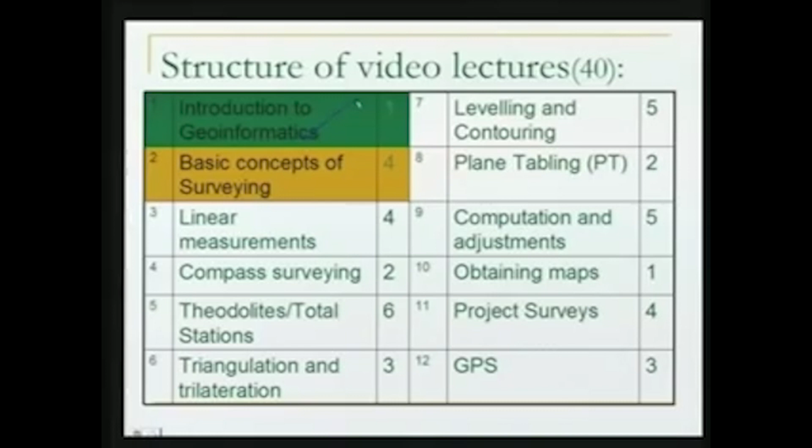Okay, hello. So we are again in another lecture on basic surveying, and this is lecture number 2 of module 2. Our module 2 is on basic concepts of surveying. Let us go back to our entire structure of the video lectures. We have already done module 1. We are at the moment talking about module number 2. In module number 2, we have already discussed this particular part in our last lecture. So let's just recapitulate that.

We defined surveying, and also we said how surveying is of concern to engineers, maybe mining, maybe civil, any. And basically our aim is to measure the geoinformation. Now we saw many examples. We started from building construction, town planning, the example of the Eurotunnel, a bridge, a road or route alignment, and using all those examples we understood how surveying is useful for an engineer.

We cannot do any project without surveying, because we need to bring the ground into the laboratory. This is what we saw yesterday. Then only we can work on that ground. Working means the planning, the designing, all those aspects. Once that design is complete, we take that design to the ground. So again measurements are involved. So we saw yesterday where surveying is required.

Then there are two types of surveying. One we say surveying, and the other one is laying out. Surveying means doing the measurements there on the ground, making the map, doing other kinds of measurements of geoinformation, and then bringing it into the laboratory. Once it is in the laboratory and we have worked upon it, our design and planning, we take it out. So that part was called laying out.

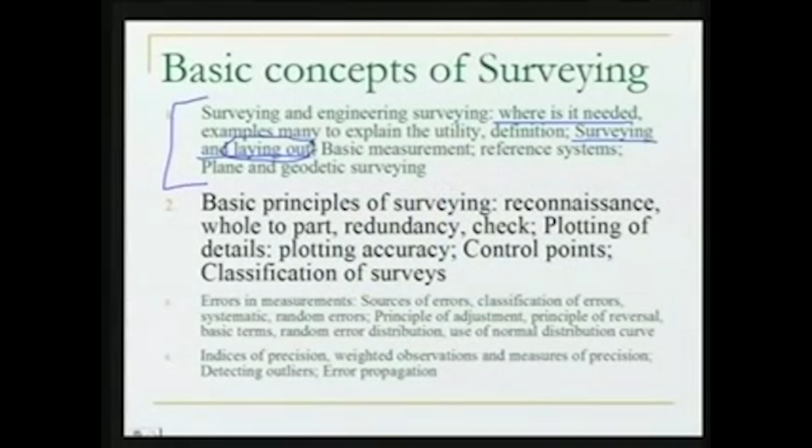Then we discussed that surveying is basically about measurements, and we cannot measure without any reference. I gave you an example of a 1-year-old child, and his father was telling me that his child is of this height. He forgot to put the other hand, the reference, because a 1-year child can't be of this height. So the reference is required. So the reference is very important in any measurement, and we need reference for measuring the geoinformation.

Now what is the reference? Reference is a mathematically definable system. The geoinformation is on the surface of the earth. Can we use the earth surface as a reference? It is not possible, because the earth surface is not definable. We do not know the characteristics of the earth surface. We can't put any equations for that. So we cannot use the earth surface as such. So what was the other thing?

We thought of a surface which is physically existing. That is the equipotential surface, a surface which is always perpendicular to the direction of gravity. This surface is also called the level surface or geoid. And the physical surface which is a geoid is the mean sea level or the surface of the water body, because all over the water body the potential will be the same. So the surface of the water body makes a surface which we call the geoid.

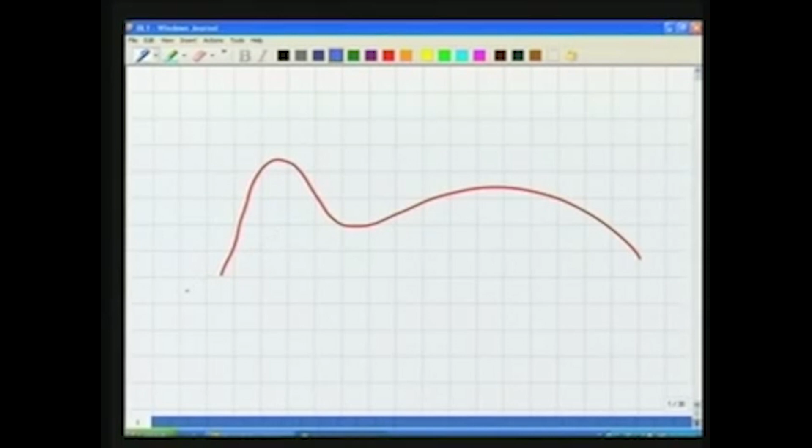So what we did last time, I am going to draw the surface of the earth here, and the geoid in this, let us say, is like this. Here in this part, it is the surface of the sea maybe. So what we can do now, we can refer the heights of points from the geoid. So that's the direction of gravity. Similarly here, for this point, we can refer the height of this point from the geoid. Also the same thing here, the depth.

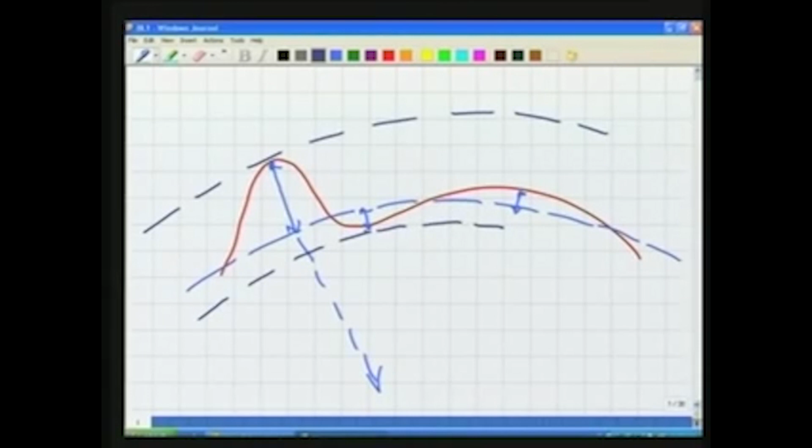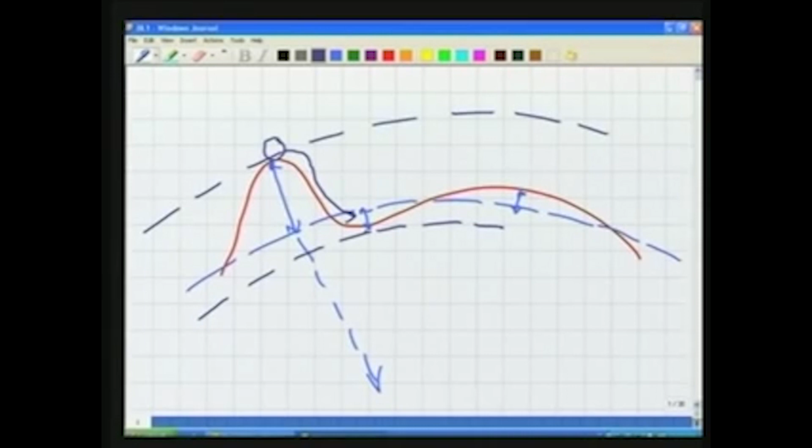Now what we are talking, we are talking that there is another level surface here, an equipotential surface. There is one more equipotential surface passing through this, and as we see, if we put a water droplet here, it will flow in this direction because this level surface is higher than this level surface.

So what we say? We say this point is higher than this point by this amount. So the difference in elevation between 2 points is the separation of level surfaces which are passing through those 2 points. So in any engineering survey, we use the geoid for measuring the elevations.

Well, when we are talking about the geoid, how about the x and y? Yes, we can use the geoid for measuring the elevation, but what about the x and y, the positions? So what we did for that, we considered that for our earth, we can fit an ellipsoid, an ellipsoid which fits best to the surface of the earth. Now this is an ellipsoid for which we know the mathematical equation, and we can project our points on the ellipsoid.

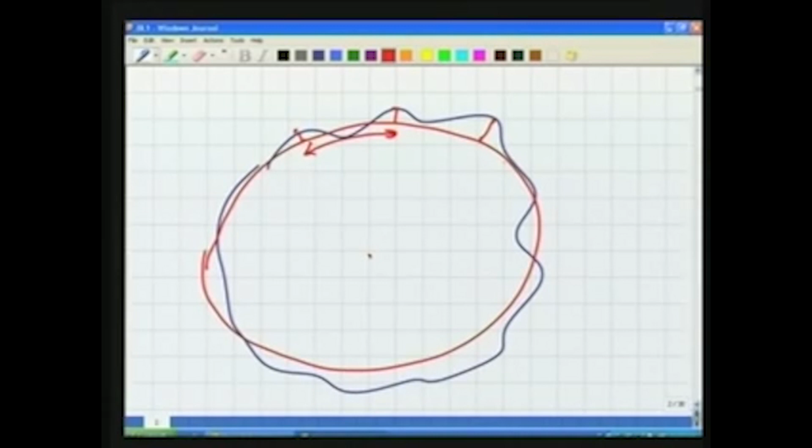So now the distance between these 2 points is actually the distance here on the ellipsoid. We know the equation of the ellipsoid, so we know the characteristics of the ellipsoid. So we can use the ellipsoid for measuring x and y.

Now another thing, why do we need a reference? As you know, Mount Everest is the highest mountain in the world. How come? Why not the Alps? Because both of these have been measured using the same reference. If both of these were measured using different references, we could not compare these two.

So Mount Everest is in one part of the world, while the Alps are in another part of the world. So in order to compare these two, we need one single reference which is passing through both of them, and only then can we compare the elevations or the heights of these two. So for this purpose, we need one reference system.

Well, we are saying that our reference system is ellipsoidal here, and any distance that we are measuring between point A and, for example, point B here is the distance along the curvature. Of course, the distance between points A and B should be measured considering the curvature of the earth, because this is how they physically are. But this is true only if we are talking about a very large area. This is not true if the area is very small.

So for our engineering surveys, our areas are generally smaller. An engineering project, for example, let us say it is 20 kilometers by 20 kilometers. Then the separation of the geoid or the ellipsoid or the curvature of the earth from a horizontal plane in 20 kilometers is only 10 mm. I am sorry, not this way, but this separation means the difference between the length of the chord and the length of the arc for 20 kilometers. This difference is only 10 mm.

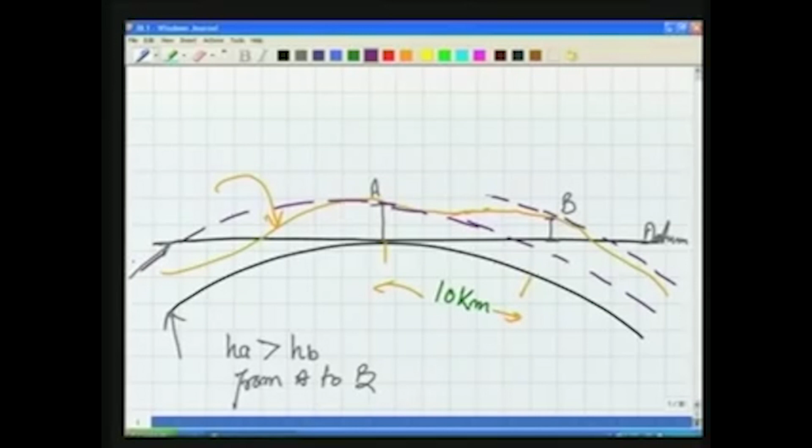Well, let us look at the geoid or the level surfaces, equipotential surfaces. The equipotential surface passing from A will be again parallel to the geoid. So, we can draw it like this, and also from B, passing from B, will be like this. Well, what we observe, one thing very interesting: the equipotential surface or the level surface which is passing through A is higher than the equipotential surface from B. What is the meaning of that? The meaning of this is the water will actually flow from A to B, not from B to A.

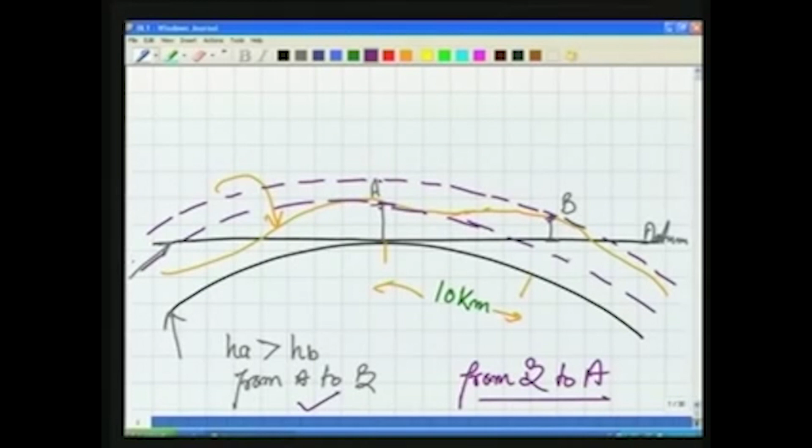So, what do we mean by this? We mean that if we are taking a horizontal plane for measuring elevations, our elevations will be wrong. It might happen that we are giving the elevation to a point, as here A, more than to a point B, despite the water flowing from B to A. So, we must always measure the elevations from the geoid, not from the horizontal plane. In all our engineering surveys, we can consider our earth flat for x and y, but for Z we must measure from the geoid. So, this is an important concept, we should keep that in mind. This is what we had discussed last time. These are important concepts, that is why I wanted to repeat these.

What will we do today? Today we will start our discussion with some principles of surveying. Now, what is the meaning of this? The principles of surveying means there are some things which we should keep in our mind always whenever we are doing surveying. And in order to explain all those things, I will give you one example and we will start with that example. Let us say there is a field, an area, a terrain, of any size on the ground. There are some rivers here. There are some houses here. There are some roads as well.

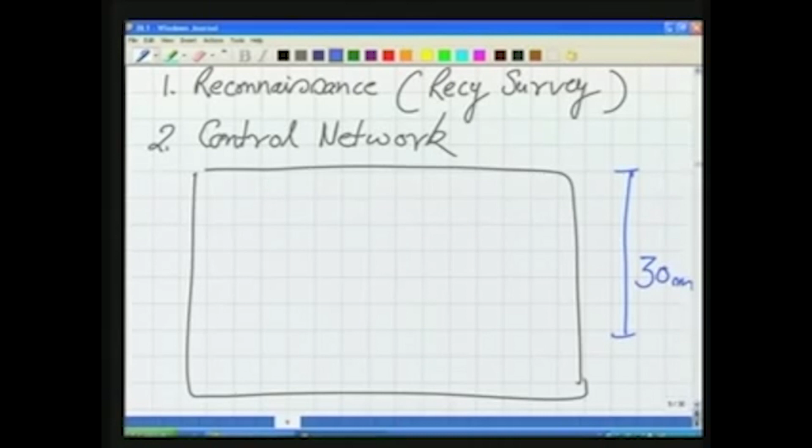It is not that you start measuring from individual trees, the distance between two trees, the distance between two houses. For example, in this area, how will you make the map? It is not that you start measuring the distances like this between the trees, between the river, from tree to the river, from tree to the boundary, these individual measurements. No. First, you have to establish a control network.

Well, the control network could be, let us say that you establish a control network here, another point here, another point here, another point here, one more point here. I am considering here that it is possible for us to measure distance across the river using the tape. It's a small river and you can do it. Okay? Now, by doing that, your network will look like a network of triangles. We'll explain this thing.

Let us say that's your network. We will understand very soon the utility of this. This network is also decided at this stage of reconnaissance. You decide about those points which will become your control points. Now, why we want to do it? We want to do it because by establishing these points and measuring the distance between these points very accurately, we can take this skeleton of the area in the laboratory.

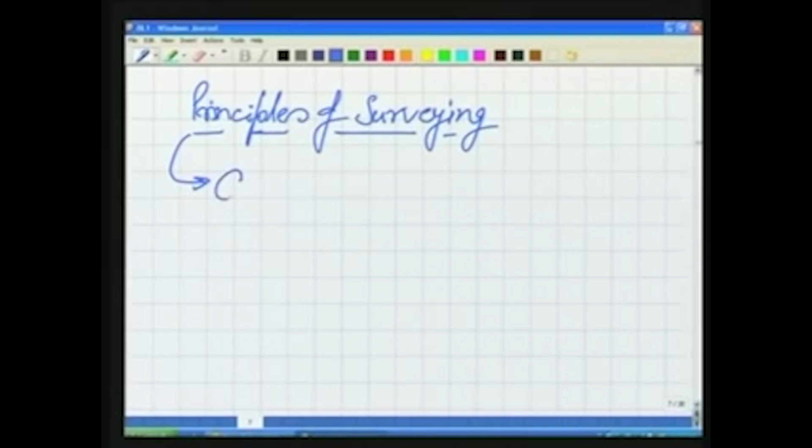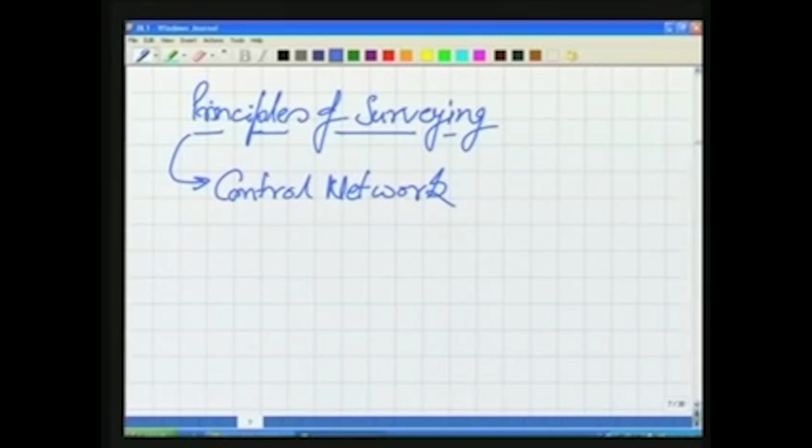So, in the case of the principle, what we learned here is control network. Always before we begin our survey, we should establish a control network, and the control network controls our survey. We will see in a moment how.

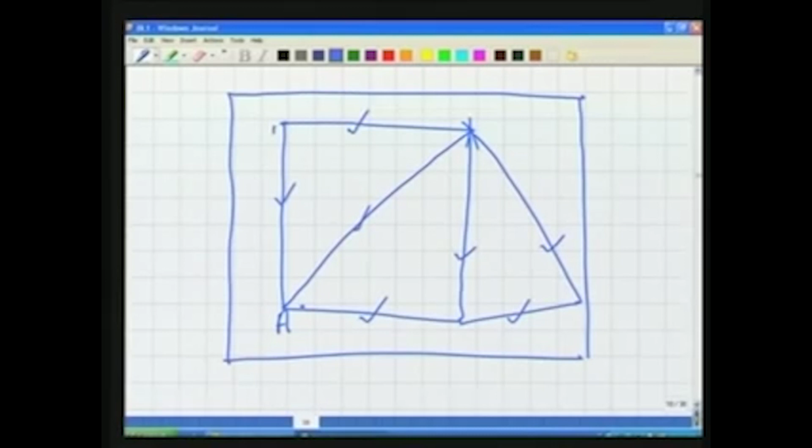Now, in our area, we want to measure the individual things. So, to measure the individual things, from any tree I can drop a perpendicular here, isn't it? So, what I know, along this length at certain x, the distance of a tree is y. Okay. So, I will do the same thing here. Along this, at a certain length x, we have a distance y, and at that y we have a tree.

So, what have we done? We have now plotted one tree. Similarly, I can plot the other trees also. For example, let us say for this house, I take the measurements of this house from this line by drawing a perpendicular. I measure this x, I measure this y.

By measuring this x and this y, in my map this is the x and here is the y, and we know there is a house here. So, I have plotted the house also. So, now you will start realizing the significance of this control network. Now, some principles which we must follow and we must keep in our mind always.

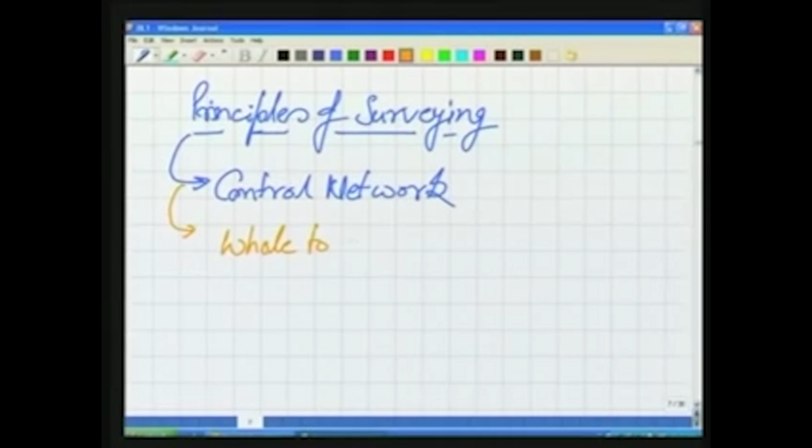One principle is working from whole to part. This is a very important principle, working from whole to part. What is the meaning of this? The meaning is, as we saw here, first we mapped the skeleton of the area. First we mapped these distances. We didn't start measurements from individual features, individual trees. Rather, we mapped our area first in a big way.

We measured these distances very accurately, the L1, L2, L3, L4, L5, all these, and then we plotted them here. We brought the skeleton of the ground here on our map. Okay? So, we are working first in the whole, the skeleton of the area we are bringing here. We are not bothered at that stage about the features.

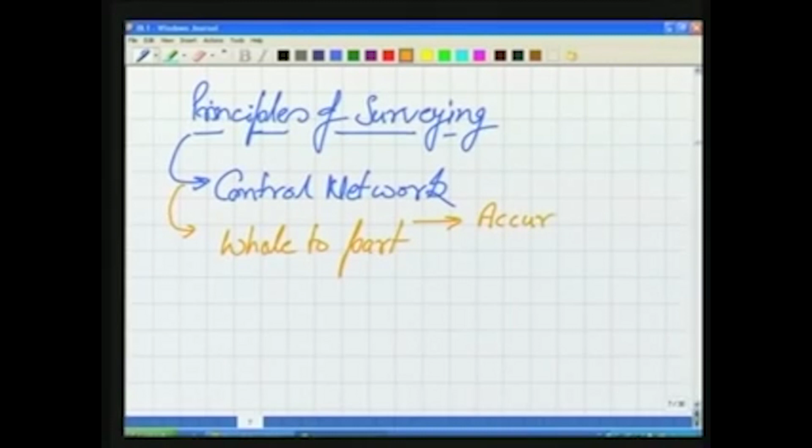But in the second stage, now working from whole to part, we make use of the control network, these triangulation figures, and then we start plotting each and every detail. Now, what is the advantage of this? Why should we do it? For this principle of working from whole to part, one advantage is accuracy. Why? Now, you take it like this.

Our first control network, the triangulation figure, we measured very accurately, and we made use of that for the plotting. So, these survey stations are transferred here very accurately because we took utmost care in measurement of lengths. Now, after that, even if we are slightly careless in measuring this y, it does not matter because it is not going to affect the plotting of this house, because these two are different things, the plot of the house or of any other tree here, which we are plotting by measuring this distance and this distance.

So, we can say x here and y here. So, by this I can plot this tree. Again, this is an independent plot. So, this particular plot does not affect at all the accuracy of this plot. We may be slightly wrong in measuring this, but it is not going to affect the rest of the map. So, our errors are not going to accumulate, they are not going to add up.

While, let us say I start doing the mapping from part to whole. What is the meaning? I measure the distance between these two trees, then between these two trees, then from here to river, from here to river. You know what I am doing? Any little error which I introduce in measuring this distance will be accumulated in all the measurements which follow later on. Okay? So, in working from whole to part, we maintain the accuracy, we restrict our survey within certain accuracy. So, this is a very important thing.

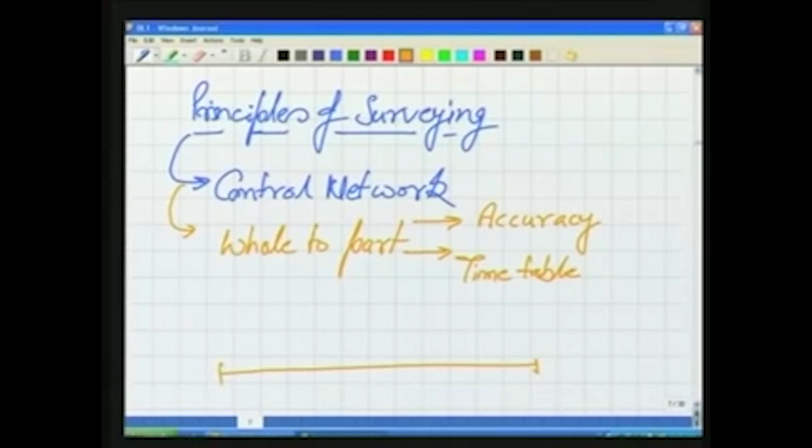And I have to plan my lecture in these 60 minutes. So, what do I do? Well, I have got 60 minutes. Now, I plan my first part of the lecture, second part of the lecture, third part of the lecture. I plan within the 60 minutes only. It is not that I am going to go over the 60 minutes, because I know my boundary, I know the whole.

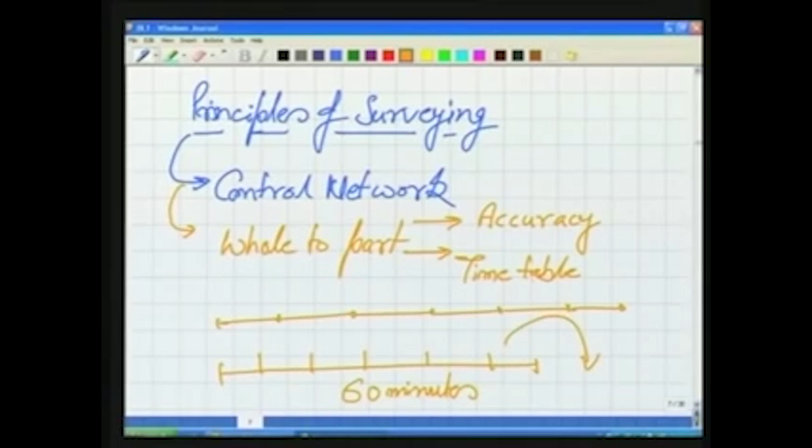Had it been otherwise, if I had not been given any time, I would plan my first part of the lecture, second part, third part, fourth part. Without knowing my boundaries, I might spill over. So that's the idea, and we should understand it, because in our life also there are many things we do where we implement this principle of working from whole to part.

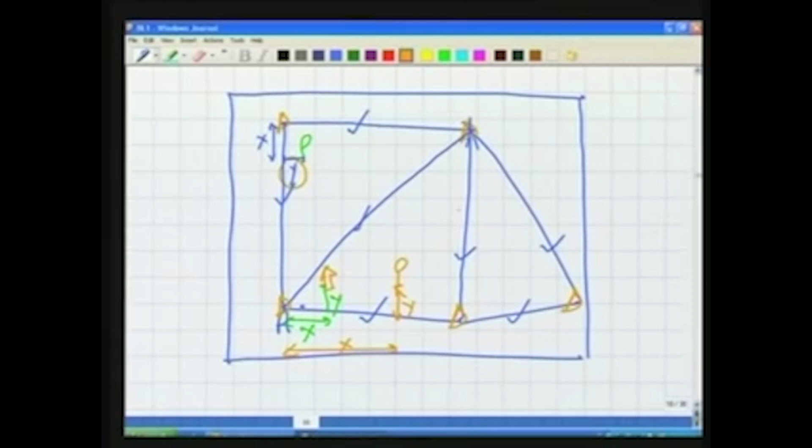Okay. Now the next principle. We have talked about one principle that is very important, and the control network is a part of that, that is working from whole to part. We discussed one more principle, that is the reconnaissance, observing the area beforehand. The next principle: we have taken utmost care and we measured these lengths. What if some of these lengths are measured with error? What will happen in that case? Let us say this L3.

When we measured it on the ground, we measured it with some error. What will it do? If we measure it with some error, it will distort my skeleton of the area. All the measurements which I carry out later on will have some error now. My map will be distorted. So what should we do? How can we avoid this kind of thing? To avoid this kind of thing, there are two ways. Number one, we say redundancy.

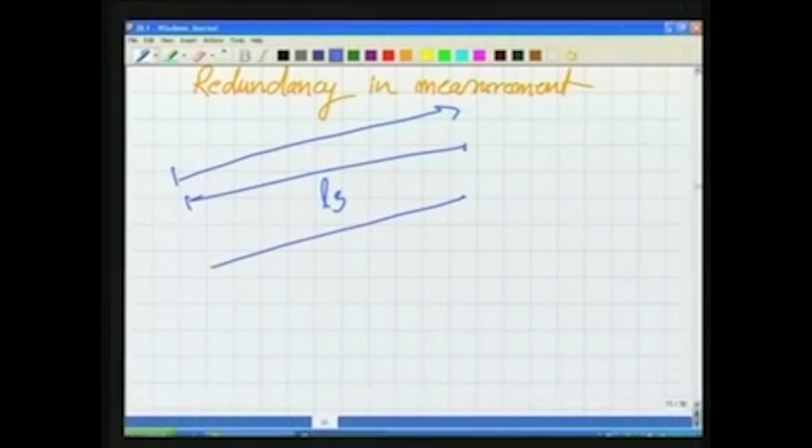In measurement. What is the meaning of that? The meaning of that is, if we are measuring a length L3, we should measure it a number of times. You measure this length from here to here one time, a second time maybe from this way, maybe a third time, fourth time. So you are taking a number of measurements for the same length. Why? Because maybe one of the measurements is wrong.

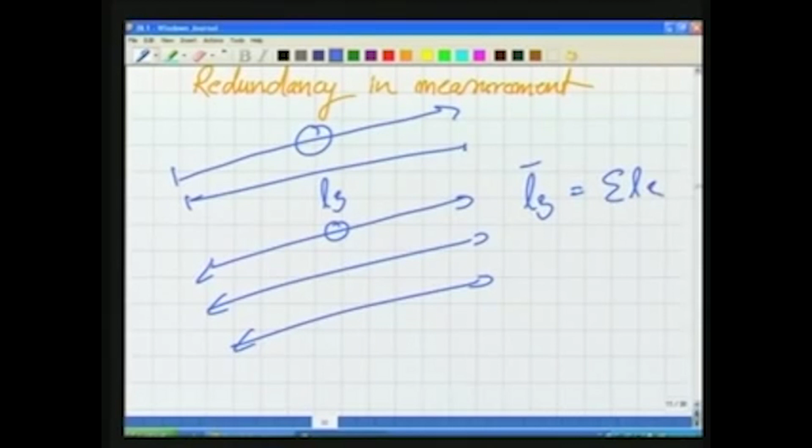The other measurement is a redundant measurement, but it ensures your final value, which you will get as the average, sigma L3i divided by the number of measurements you have done. So if you are taking the average of all the measurements you have carried out for the length L3, your value is more accurate. You are more confident about your value than with a single measurement. So we should always keep in mind that we should have redundancy in our measurements whenever we are doing surveying, whenever we are doing any measurement.

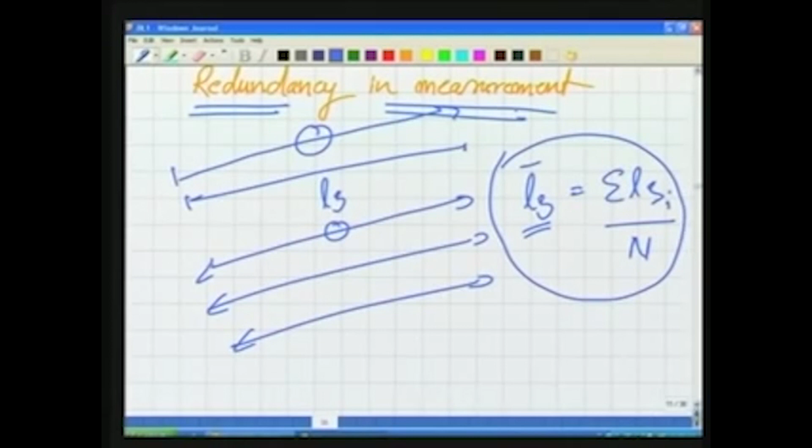The second one is, now here we carried out all these lengths and we plotted them here. Is there any other way? One way is redundancy, we introduce redundancy, but is there any other way of checking the accuracy of this system? Well, one more method is possible, and that method is what we call a check line. Now what is this check line? Here in this diagram, suppose we had also measured on the ground, let us say, this line.

What are we doing? We are not using this line, which I call capital L, for plotting my triangulation figure. I am not using it for that purpose. I am using this check line later on. Once I have plotted my network here, all these points are plotted, then I check the distance between this point and this point in the network, and I compare it with the check line which I had measured in the field. If my survey is correct, if my skeleton is accurate, then the line measured here in the map should be the same as the line which was measured in the field.

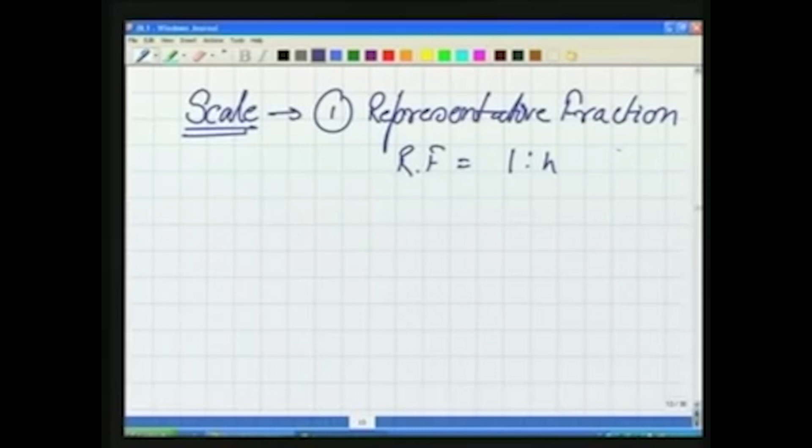Number one way of representing the scale is by representative fraction. What is this? We write this representative fraction, also referred to as RF, as 1:n. Also many times we write it as 1 by n. What is the meaning of this? The meaning is 1 unit on map is equal to n units on ground.

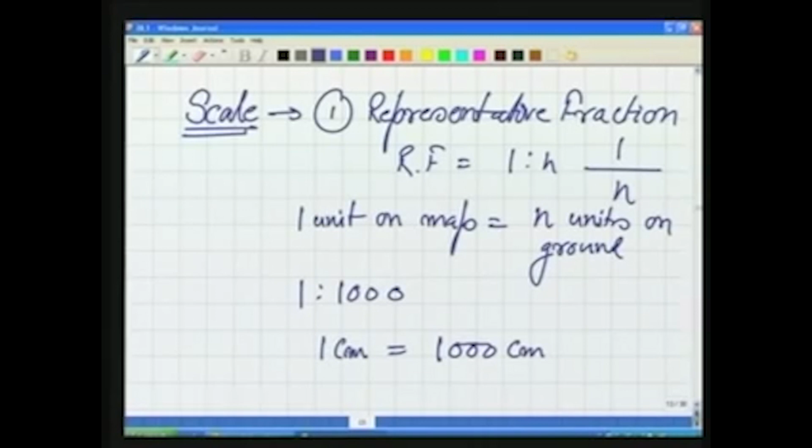Well, let's explain it. If our map scale is 1:1000, the meaning is 1 centimeter on the map is equal to 1000 centimeters on the ground. So a distance which is 1000 centimeters on the ground, we are representing here in our map by 1 centimeter. So this is how we represent the scale.

There is one more way of representing the scale, which is called engineer's scale. What is this? In case of the engineer's scale, we represent it as such. For example, let us say we write 1 centimeter is equal to 50 meter. What is the meaning of this? This is another way of writing the scale. It's the same thing as the representative fraction, but it's another way we write it down. Here again the meaning is 50 meter on the ground is equivalent to 1 centimeter here on the map.

You can easily find the representative fraction for this, 1 by n, and compute the value of n. How can you compute? You just convert this also into centimeters. 1 centimeter is equal to 50 meter multiplied by 100 centimeters. So 1 is equal to 5000. So the value of n is 5000 here. So we can convert the scales like this. We can convert the RF into the engineer's scale and vice versa.

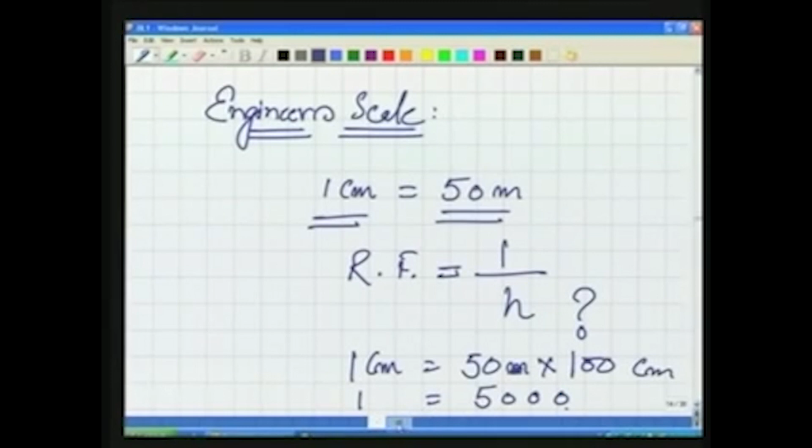There is one more way of writing the scale, that is called the graphical scale. Well, what is the graphical scale? If you are making a map, let us say this is the map, and in this map we have plotted some details. There on the map itself, we plot our graphical scale. Now what is the meaning of this?

Here in our map we make a line, and on this line we write, for example, 100 meter, 0 meter, again 100 meter, 200 meter and 300 meter. Further, we divide this first one in 10 parts. So each of these is 10 meter. Now what is the meaning of this? What are we doing? We are writing a scale on our map.

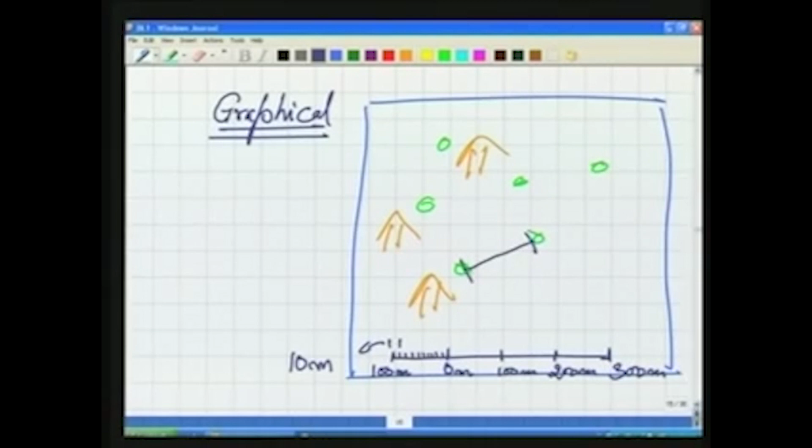Now for any distance between these 2 points, if I can measure this distance, I can bring this distance here and keep it, for example, this way, isn't it? I have brought this distance and kept it here. So you can measure the distance between these two to be 100 meter plus 1, 2, 3, 4, 5, 150 meter.

So graphical scale is nothing but a graphical way of showing your scale, because here in this case this distance is 2 centimeters. So 2 centimeters is equal to 100 meter. So we can write the corresponding engineer's scale, and the corresponding RF also. The only difference in this case is that we are showing the scale by drawing a line on the map itself.

Now, what are the advantages of this? One very big advantage is, for example, let us say an engineer's scale is given to you for this map and there is no graphical scale. It is just a bare map without any graphical scale, and the scale of the map is given only by engineer's scale.

Well, after some time, the map is made today, and after let us say 10 years, 20 years or so, the map has shrunk, or maybe it has expanded, because it's a paper or whatever the material there, maybe with moisture, with time, it may shrink or it may expand. If it is so, what will happen if this map has shrunk?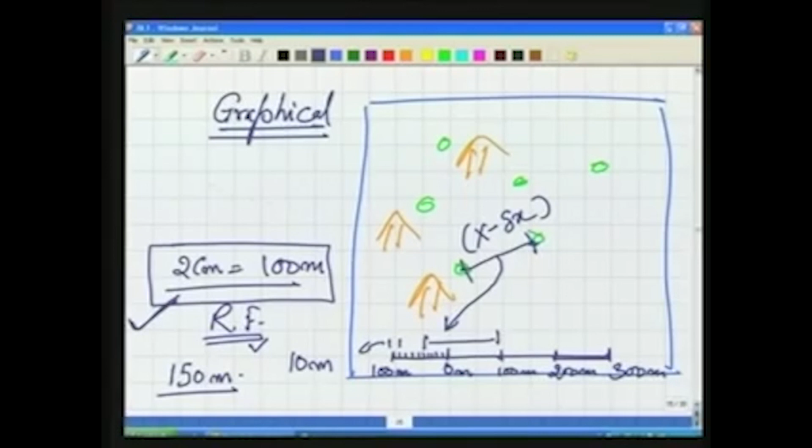So you will compute a distance which is wrong, because in the ground the distance is not x minus delta x multiplied by the scale, rather the distance is x multiplied by the scale. But we will do it like this, because what we are measuring on the map is x minus delta x. We do not know what x was unless we know the amount of the shrinkage.

Well, if you have a graphical scale on the map, what is happening there now? Whatever amount of shrinkage has occurred between these 2 points, we can assume the same shrinkage is taking place in the graphical scale also. So the graphical scale also shrinks by the same amount. So even if we are measuring x minus delta x, we will measure it here, because this scale has also shrunk by the same amount. The distance computed between these 2 points in the ground will be the same. So, that is one big advantage of the graphical scale.

Well, some more aspects. When we are talking about plotting of the map, there is one more important thing which comes into the picture, and that is plotting accuracy. What is the meaning of this? In your map, the best that you can plot is, let us say, a dot, and if you are very careful, the size of the dot is 0.25 millimeter. Using the best possible plotting pens, you can draw a dot of 0.25 mm diameter, or a line with thickness 0.25 mm.

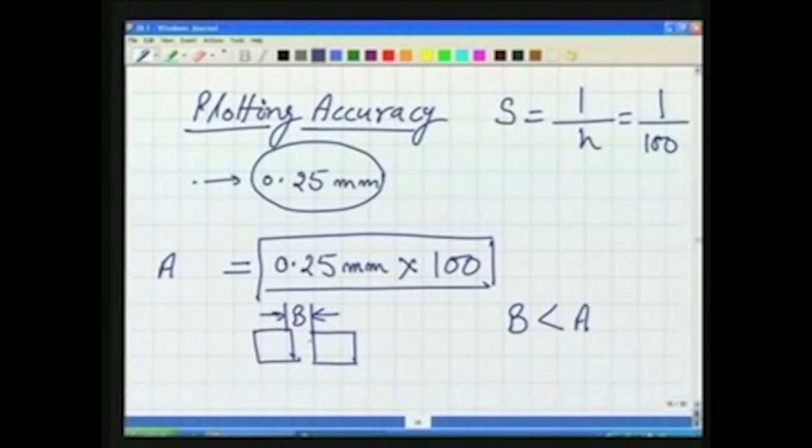In the ground, if there are two objects, let us say one object here and another object there, and we write this particular value as a, and the distance between these two objects is b. If b is less than a, what is the meaning of this? If b is less than a, even if we are measuring this b in the ground, can we plot these two objects separately on our map?

Once I am plotting the map, I plot my first object. Where do I plot my next object? To plot my next object, I cannot go here, because the distance between these two is within this line itself. So my next object will also be plotted together, isn't it? So what I mean to say is the plotting accuracy is very important.

It depends upon the scale. Depending upon the scale, there will be a certain value in the ground, this particular value, and it will change with the scale. So, whatever this multiplication gives, the a value, in the ground, if the objects or features are smaller than this size, we cannot show them in the map.

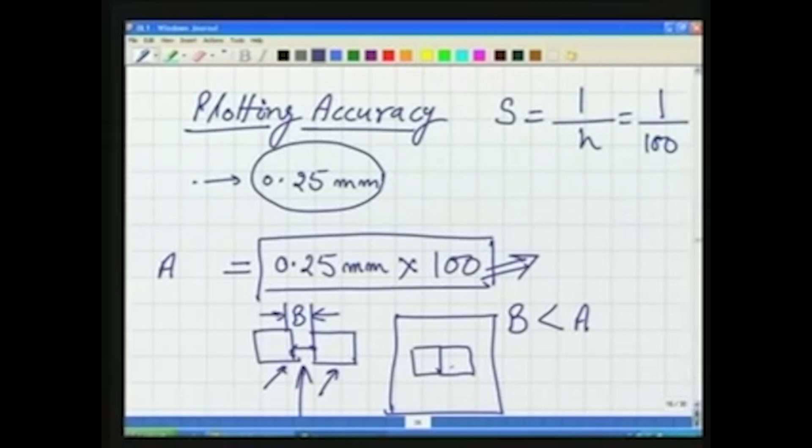Okay? Or if the separation between two objects, as we saw here, is less than the plotting accuracy there in the ground, we cannot show these two objects separated here in the map. So, we should always keep in our mind to what extent we should go and map. This is very important, this plotting accuracy.

Should we measure very accurately in the ground, as in the previous example? Should we measure these two objects, that distance was b, as separate objects there in the ground, or should we measure them as one? Well, the decision is to be taken by your plotting accuracy, what your plotting accuracy is, what your scale is, because what you do, you compute

multiplied by your scale, and any distance, any object, any separation there in the ground which is less than this value should not be measured, because we are not able to plot it. We are able to plot the things which are more than this only. So, this is very important. We should always keep in our mind that what information we should measure in the field is controlled by the scale.

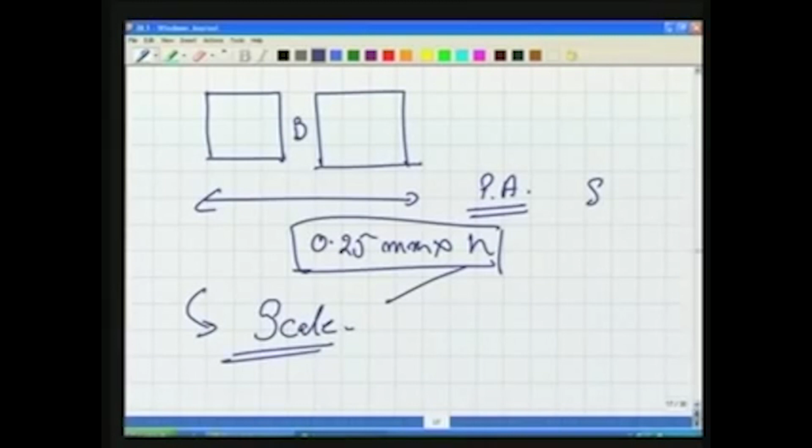Okay? Having seen all these things, what we have seen so far are some principles of surveying. For example, in any mapping exercise, we must do the reconnaissance, number 1. Number 2, we should establish a control network, because we want to work always from whole to part. And we fix the control network in our area first. I gave you the way we can do it by triangulation. We will see later on that we can do it by many methods.

We establish the control network. We measure it very accurately, so our skeleton is fixed. We can bring this skeleton into the laboratory, plot it. Now we work in parts. We measure the individual objects. Okay? And then while we are doing the plotting, we need to see about the scale. What scale is to be chosen? Well, one more question here. How to decide about the scale?

Can you think of some points? Well, the scale will be decided by, number 1, size of the area. If there is an area, for example, 10 kilometer by 10 kilometer, and you have a plotting sheet of, let us say, 50 centimeter by 50 centimeter as the plotting area, what will be the scale? You know, you can find the scale. But size of the area is not the only criterion by which the scale is decided.

Many times the significance. What is the meaning of significance of work? When you want to go for higher scale, when you want to go for lower scale. Sometimes you want to go for higher scale, you want to plot at 1:100. Sometimes you want to plot at 1:100,000. When you want to plot at 1:100,000, the meaning is you want to plot a map of an entire state, of an entire country. For example, the entire Uttar Pradesh we want to show in one map.

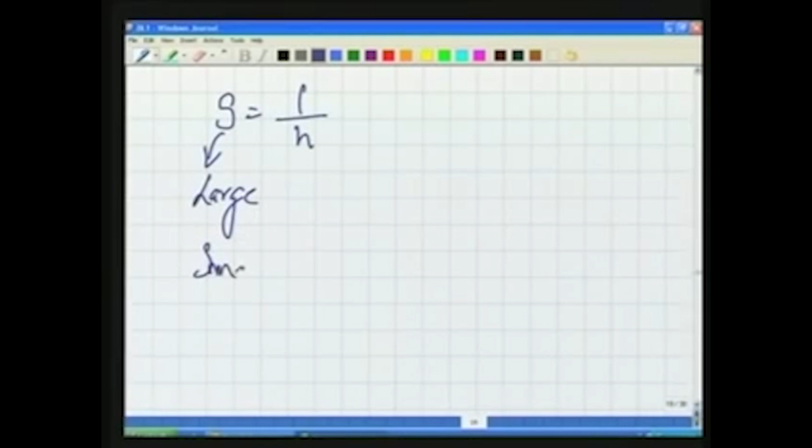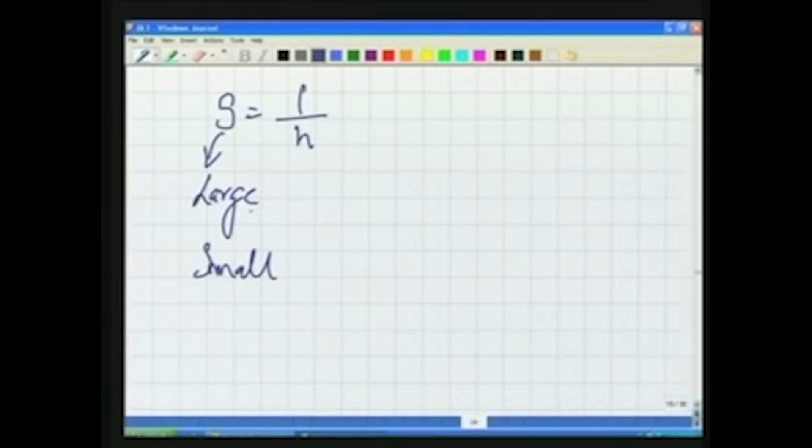So, depending on this value of S, the scale is said to be either large or small. If S is large, it is large; if S is small, it is small. So, we should know when we say a scale is large and when we say a scale is small. In large scale and small scale, the amount of information will be different. Okay.

Now, because we are doing some kind of repetition, after talking about the scale, we talked about the plotting accuracy. Why is plotting accuracy important? Because we can decide what level of information is to be captured in the ground, is to be measured in the ground. It is decided by the plotting accuracy or the scale. So, we should know this thing, we should be aware.

Then the other thing, whenever we are doing any measurement, we must do the measurements with some redundancy. We should have redundant measurements. Then the other thing, we should always have the check lines, because we want to ensure after doing our work, we can check our work, the accuracy of our work. So, we must have the check lines in our work. So, these are all important principles of surveying we should always keep in our mind whenever we are doing any job. Now, finally, how we plot the details, a little bit about it.

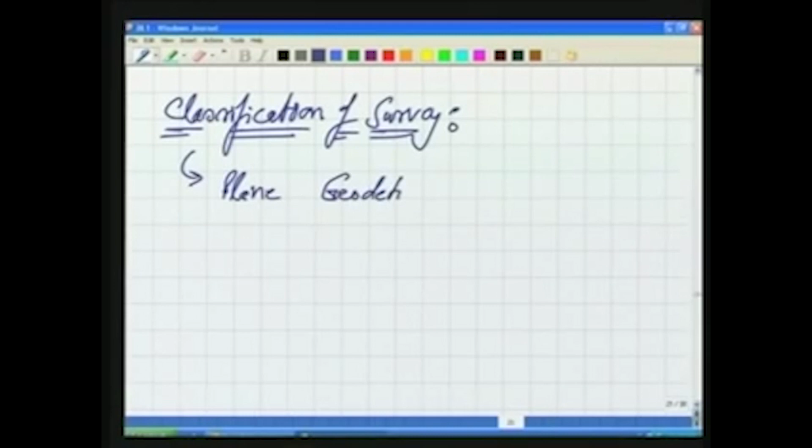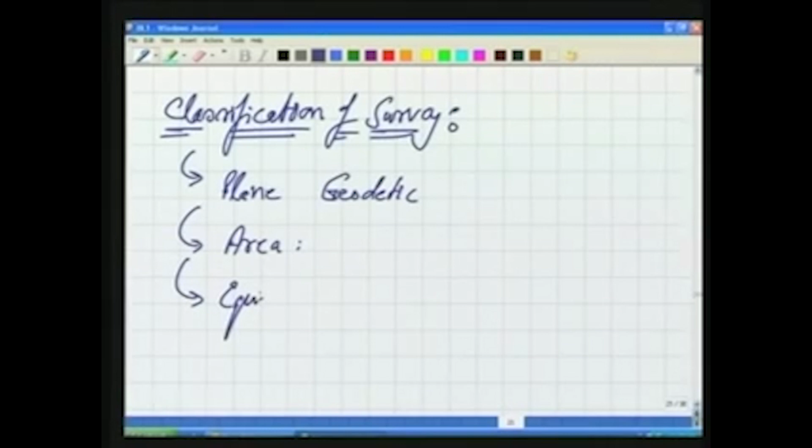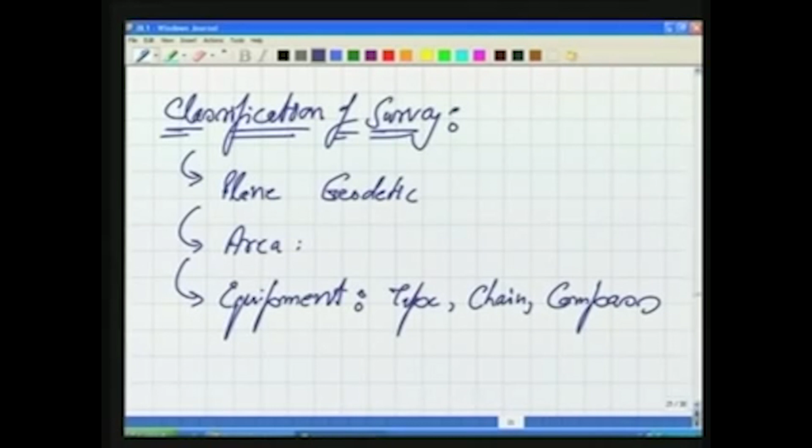Finally, a little bit about classification of survey. You should look in your books about this, because this is nothing very important, how we classify the survey. We have seen already plane, when we consider our earth to be flat, or geodetic. Another classification is as per the area. For what kind of area are we doing the survey? Is this a town? Is this a village? An agriculture area? So, we do the classification based on area. Also, we can do the classification based on equipment. What equipment are we using? Are we using tape, chain, compass, theodolite, total station, GPS, as we will see later on. So, we can classify our survey this way also.

Then we can classify using the method, the technique. The meaning is, are we using triangulation, or are we using the traverse? We will talk about all these things later on. Or are we using any other method for doing our surveying? So, our surveying can be classified by all these various categories.

And one more classification is possible, which we call by the function or the use. Who is using the survey? Who is doing it? Is this a military survey? Is this an agriculture survey? Is this a hydrographic survey? Who is the organization doing that survey, and what is their purpose for the survey? Is this a mine survey, or is this a survey for a geographer? So, depending on the functionality for which we are doing the surveying, we can classify our surveys. Not a very important concept is involved in this. So, I will advise you to go through your textbook and read about this.